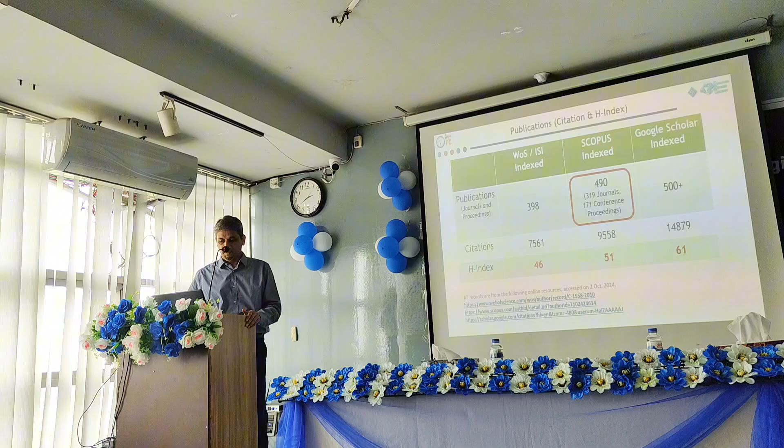Definitely, I have so many co-workers. I would like to acknowledge first, before I start my topic, the 2 research institutes I worked in Malaysia. One is University of Tenaga Nasional, or National Energy University. The other one is the National University of Malaysia, where Liku did his PhD. He was supposed to do PhD under me, but he changed the field, and that is very good luck for him, I believe.

Still we are connected, my students, my colleagues, and my collaboration partners, home and abroad, Malaysia and other countries, and also the useful literatures I use sometimes, and some of the pictures I use here.

So we always prefer that we are committed for a solar green Earth. As of today, you know that this university is very lucky to be so green, but if you go to other places, they are not lucky. There's one building, for example, if you go to Brac University, if you go to East Coast University, I've been there for some other purposes. I saw that even the places in Bangladesh, other places, are not as green as you are. You are very lucky. So we are also committed to make the Earth real green with the use of solar energy. That's what our slogan is.

One of our efforts I always share is this book, Academic Press, published in 2020 I think. It's a group effort from our research group, and I have contributed 2 chapters, which is available: comprehensive guide on organic and inorganic solar cells. The first chapter and third chapter is contributed by me. You can check, this is the group effort. This is really a nice book, you can share and sometimes refer.

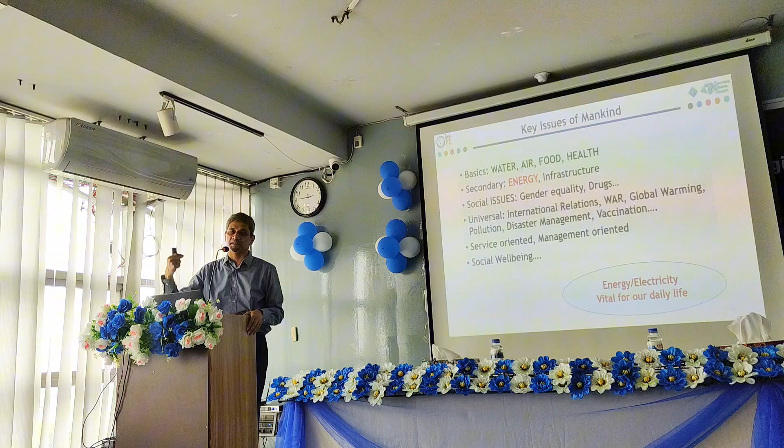I cannot simply discriminate against the effort of any single researcher who has published one paper with his integrity, with his honesty, with all his effort. He is also equally important as I am, at least I can say.

So here, the key issues of mankind, the basic needs: we always know that we have water problems, air problems, food problems, health problems. The secondary energy infrastructure, our road infrastructure, is suffering a lot. We are losing work hours, man-hours every day. A huge amount of man-hours of the whole country is being lost due to communication problems, right? So there are so many problems.

So electricity is one of the problems, energy, because this is vital for our life nowadays. Without electricity, I'm not sure whether we even have electricity here right now. We don't have electricity, right? Yeah, or it's running on the IPS. So sometimes during the lecture we also see interruptions of electricity, this and that.

So Sir already mentioned that we have 3 conventional ways. In fact, most of them are God-gifted, like coal, gas, and oil. These are God-gifted fossil fuels, which were accumulated over millions of years. But within the last 200 years, we have been so lavish using them. Now we are saying that crude oil may last 40 years, natural gas may last another 60 years, coal may last another 80 years.

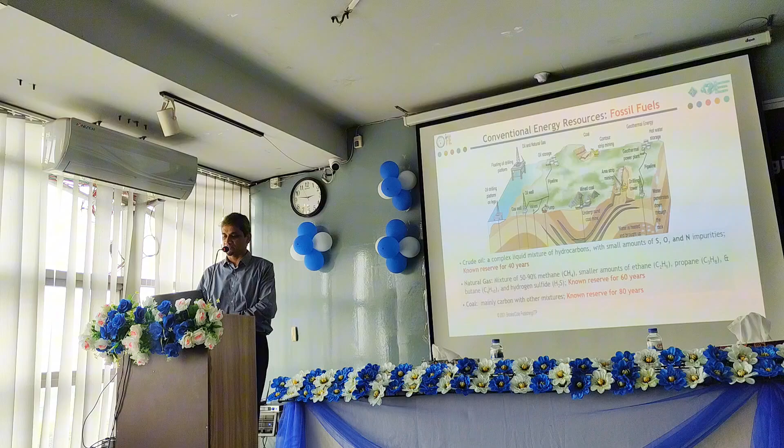So we already know these reserves are very limited. We cannot simply solve the problem because we are too dependent on this and we have been so lavish using these things. These are called non-renewables, and these non-renewables have disadvantages. What are the disadvantages? The main issue is pollution. We have so much pollution due to this lavish use of fossil fuels, like air pollution, water pollution, land destruction, and also radioactive waste from these so-called nuclear power plants. And also we have wars. The war happening around us is not for peace; it's for domination of the oil field.

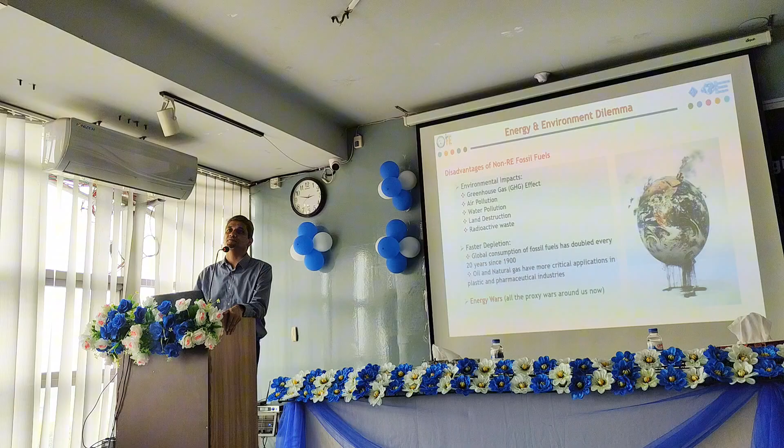In a single line, this is domination of natural resources. We have problems associated with the usage of renewable and non-renewable resources like fossil fuels. So what is the problem, and what is our main refuge, or how to overcome these things?

So there are countries now who are enthusiastically adopting these renewable resources. Many countries are using renewable resources, and you can see some catchphrases, like India has the world's largest solar farm, and some countries are changing their golf fields to this and that. Every day you will find new things.

I started this research in 1996 when I started my master's in Tokyo Institute of Technology. At that time it was a very meager, very small figure of renewable energy adoption, maybe less than 1% in the whole energy scenario. Now it's different - over 25% global final energy and over 30% of electricity production are coming from renewable resources. This is the new figure.

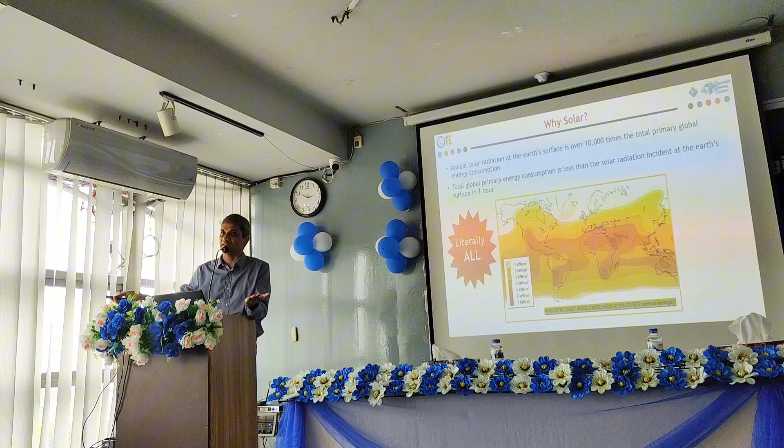So as I mentioned, how can we get solar energy in the form of usable energy - meaning electricity? Straightforward - the purest form of energy is electricity. Electricity can be converted into many other options: sound, heat, whatnot. So how do we convert this solar energy or sun's energy into something usable, or electricity?

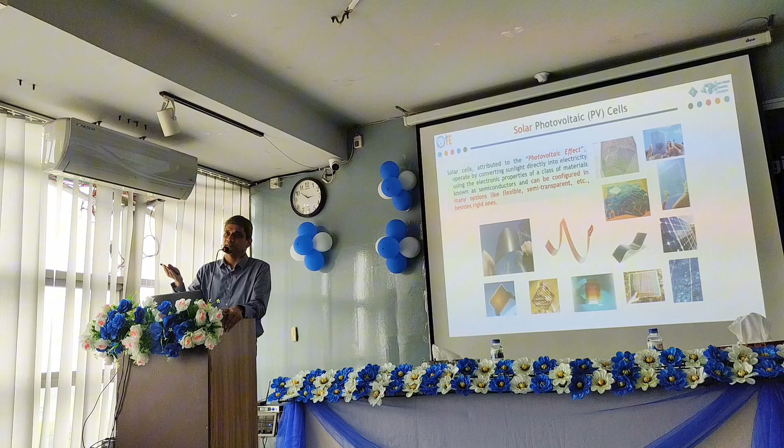There is some physics behind it, called the photovoltaic effect, which was discovered almost 200 years ago by French physicist Edmond Becquerel. Recently, maybe in the last 60 years, we started making conversion devices, which we later named solar cell or solar photovoltaic cell. This photovoltaic effect means whenever you put some materials under light, any kind of light, they produce some kind of voltage - that's why it's called photovoltaic effect, or photovoltage is created.

Using this physics phenomenon, we can make different kinds of devices, like a kind of sheet, a paper sheet. If you just face it to any kind of light source, it will silently produce electricity. All you need to do is make the solar panel. So for the working principle, I have a video here - I'm not sure whether it will work, let me see, it's from the NASA website. So from the sun, we are getting packets of photons, which we call the particle of light.

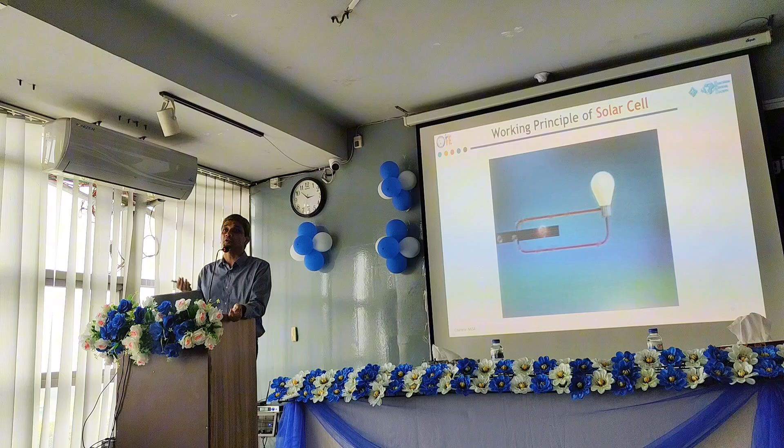So whenever the solar cell, a 200 micron thick PN junction, large area PN junction, is struck by the photons, what will happen? This junction area will release energized electrons, which will come through the circuit. So all we have to do is wait for whenever the sun is up. Even though there is no sun, even 10%, 20% light, electricity may be produced from the same cell. There is no need of direct sun.

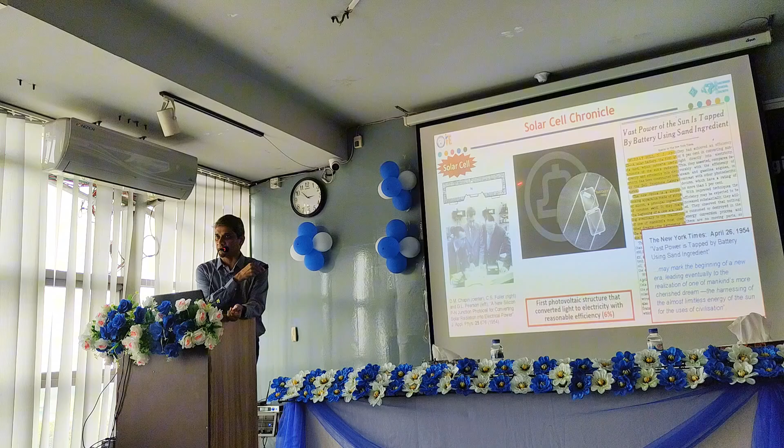So this is the solar cell, a very simple device. As I mentioned, almost 60 years ago, Bell Lab first invented it. Three gentlemen, Chapin, Pearson, and Fuller, invented this p-n junction solar cell: N-type semiconductor covered by p-type semiconductor, with only two terminals. This solar cell was invented around 1954, and it was producing 6% efficiency, meaning if 100% light comes into that area, through the terminal you get 6% electricity. We call it energy conversion ratio, or simply efficiency. So this stuff, whenever it was invented, was a very precious thing.

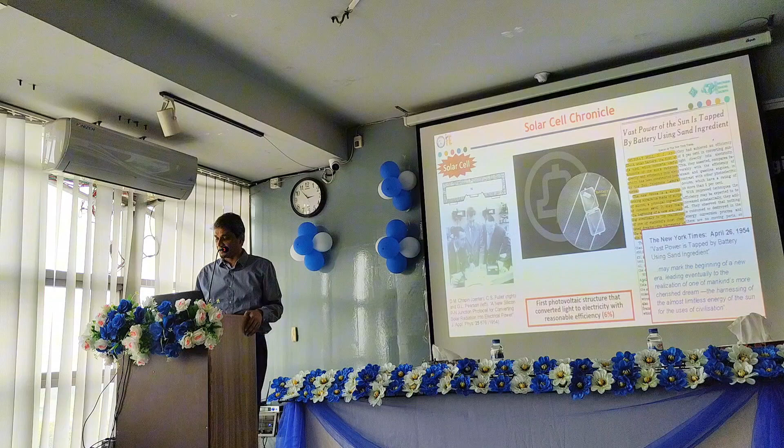There was a newspaper article, you can see on the right hand side bottom, 1954, in the New York Times, saying the vast power is tapped by battery using sand ingredient. Sand is silicon, so it was made of silicon. In fact, this solar cell, after 60 years, is giving 1.5% efficiency still, which shows its integrity and durability.

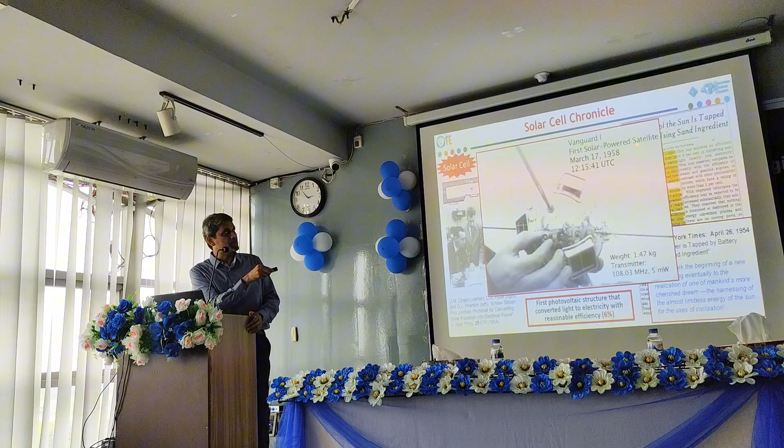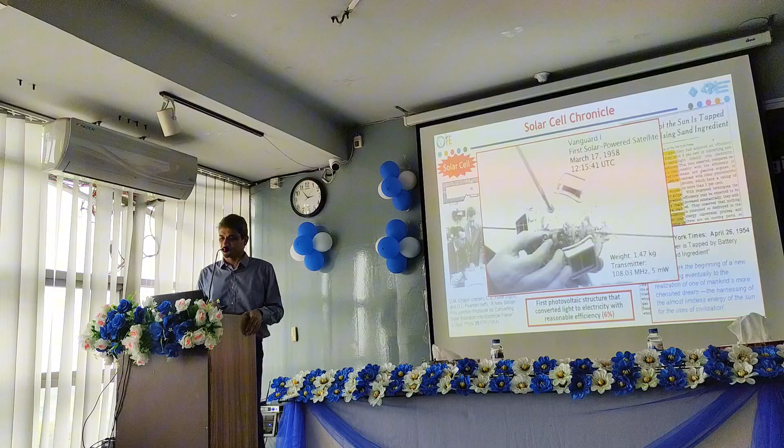Interestingly, after it was invented in 1954, solar cells were being used only in space applications. This is the first solar-powered satellite, which was launched in 1958, and it is still giving us some ping. I got a public lecture where the professor showed us this one, this bird is giving us some kind of signal called a ping signal. So it is still running on the solar cell.

Classification of solar cells. I'm just talking about solar cells because it has huge potential for research. We have so many combinations and permutations of different materials, different device structures, all those things. So there are so many ways to do research. Let me give you the classification in terms of generation.

The first generation solar cells were basically made of silicon, crystalline silicon. There are two factions: one is single crystal or monocrystal, the other is polycrystal solar cells. You can see on the left side. And in the middle, the thin films, which you can put on glass, polymer foil, or metal foil, a thin layer of semiconductors to make solar cells. I did my master's and PhD on this, so I have expertise in this.

And then the new versions, over the last 20 years or so, a new material called perovskite, then tandem structures. There are so many different configurations, then dye-sensitized solar cells. There are so many different materials and configurations, so we can make a lot of options. Research papers will come out from that if you simply focus on it.

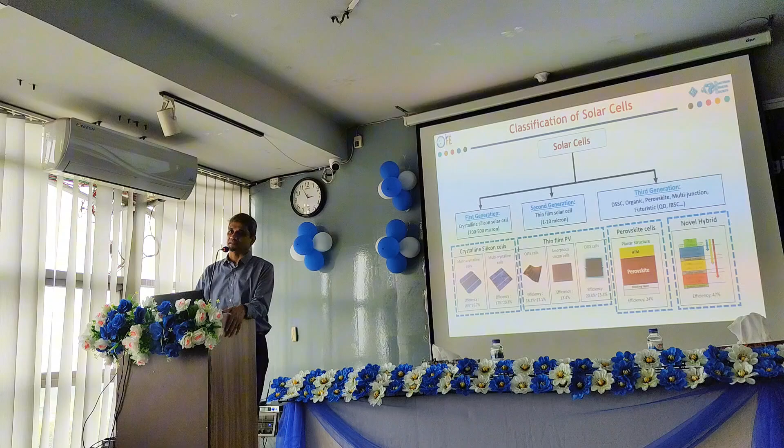Evolution of solar panels. Whenever I went to Japan for my undergraduate study in 1990, I purchased this in 1991. This is a Sharp calculator with thin film technology solar cell, almost 32 years ago. This is still running, and it was in the milliwatt peak range.

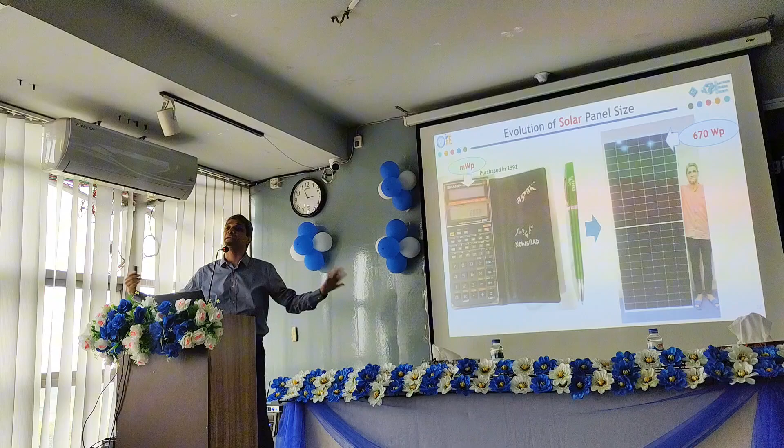Now recently I visited one of my students' companies in Bangladesh, in Dhaka. He showed me, sir, this is the panel we are using for a rooftop project. So how big is it? Physically it is bigger than me, more than 2 meters, and wider. What is the electrical output? Electrical output is 670 watt peak. This one was milliwatt, maybe 1 or 2 milliwatt peak. So how many times has it evolved? It's big and large now.

Are commercially available solar panels widely used? Yes, first and second generation solar cells are commercially available, as I showed in the classifications, many different kinds. But in Bangladesh, you can find only monocrystalline and polycrystalline, you see the dark color, black color, or blue color, only these two colors you can find. The rest are second generation solar cells, which are not easy to find here.

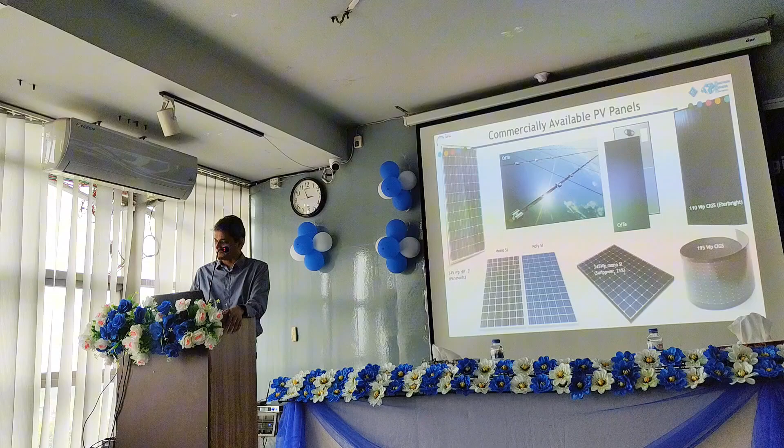Different kinds of solar cells are improving cell efficiency. Whenever efficiency gets bigger, we get more output - the same area gives more output if efficiency is larger. This is what the research community is contributing: how to improve solar cell efficiency and how to reduce the cost. These are the two key points.

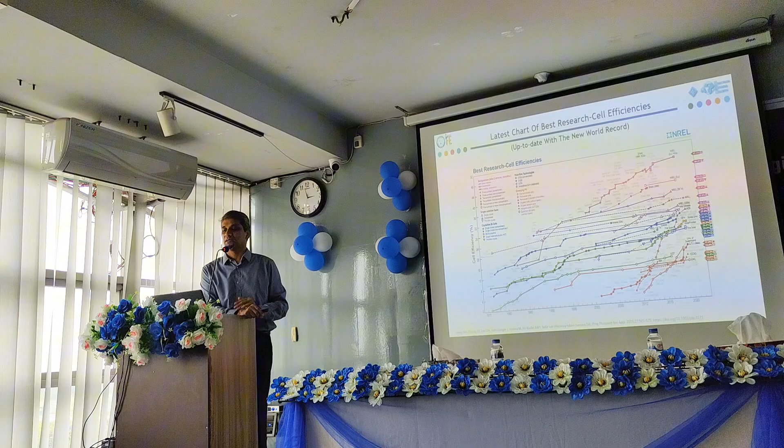Over the period, we can see some solar cells are 47% efficient, some are maybe 11% efficient, but they are of different kinds and of course different cost per watt peak. Definitely, if you pay more, you will get 47% efficient solar cells.

Where are they being used? They are used in space applications, satellites - these are the concentrated type or multi-junction solar cells. Other solar cells, most of them, we use here in terrestrial applications.

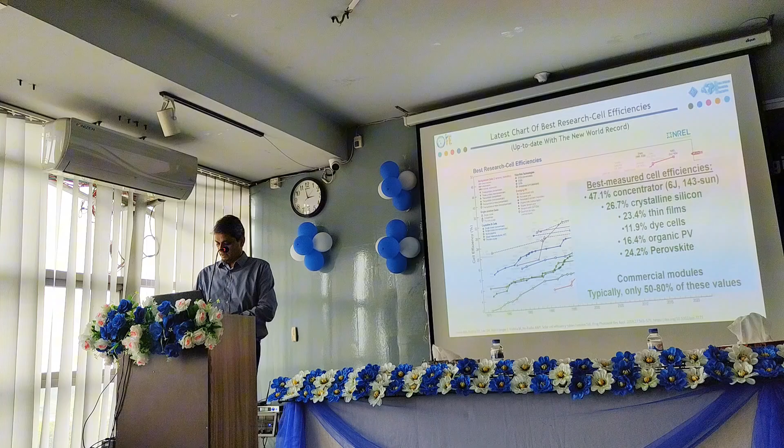How did we get this over the last 30, 40 years? Because people work very hard. Researchers like you work very hard around the world to improve the efficiency year after year.

People are using one-panel systems for rural electrification and water pumping. Even in Japan, the rooftops are no longer distinguishable - they are building integrated, what we call building integrated photovoltaics.

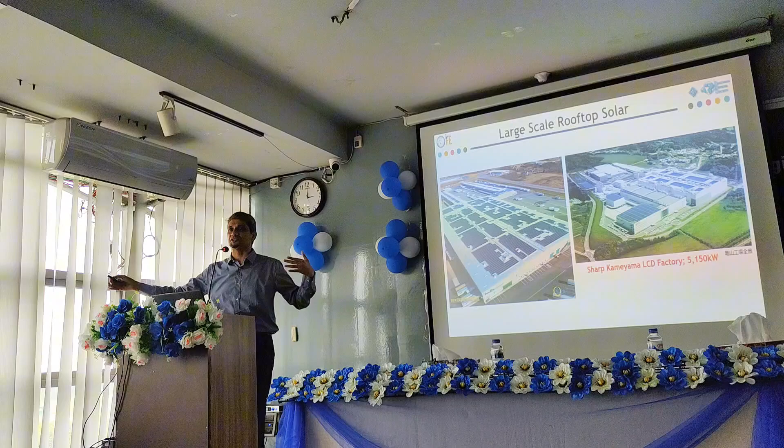There are many large area installations like manufacturing plants, R&D facilities, and ready-made garment factories in many places in Bangladesh that are now enthusiastically installing solar panels. And if we complain about the land problem, the solution is there.

Agrivoltaics - you can simply put the panels up about 2 meters high and still cultivate underneath the solar panels. In Bangladesh, in Sirajganj, there are now 68 megawatt peak installed this way, so that they can cultivate vegetables and other things beneath the solar panels. I'll show the picture later on.

We can take lessons from other countries. Even without knowing it, in Mithapukur, there is a system by Nowshad where they just put solar panels, and they found that beneath it, paddy still grows the same way.

Now the question is, we talked about solar, but is it possible to compensate or replace nuclear power plants with solar plants?

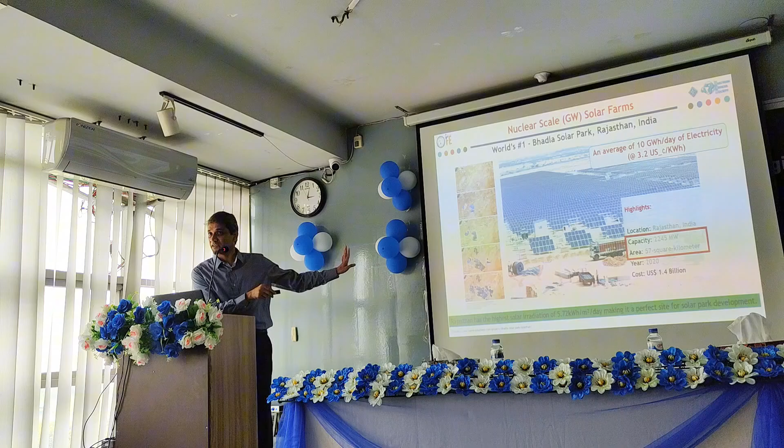The cost is 1.4 billion US dollar. Just remember this figure. Bangladesh's Rooppur nuclear power plant, nameplate output is 2,160 megawatt, cost is 13 billion, and you have to spend billions after billions for nuclear fuel and then the waste management and everything. This solar park, every day they are getting 10 gigawatt hour per day, and the cost is 3.2 US cents, roughly 3 or 4 taka.

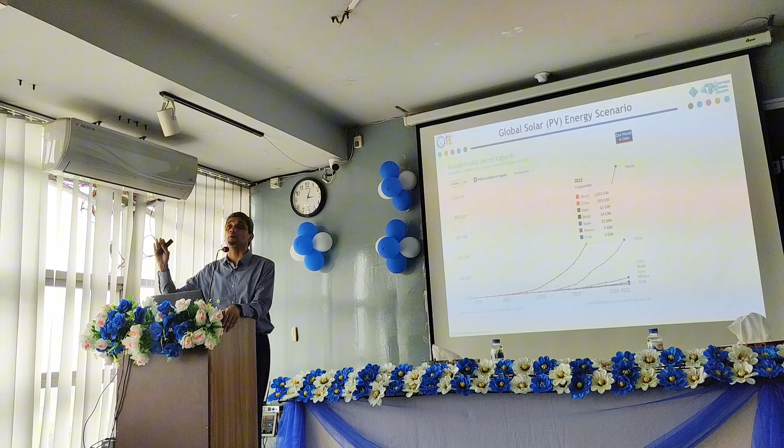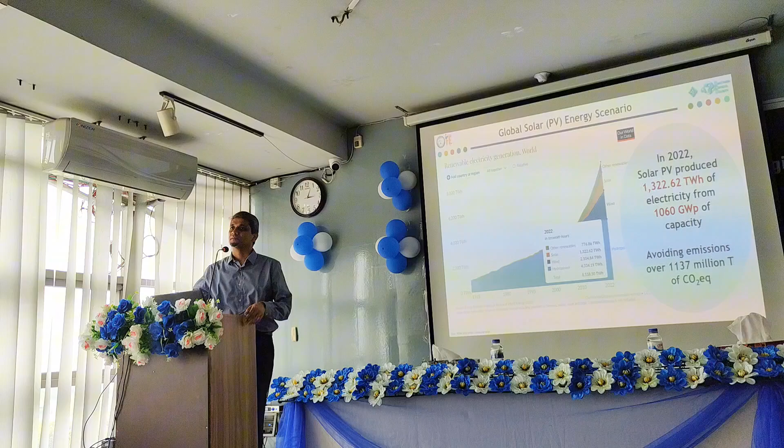So what is the scenario, the latest scenario? How are we adopting? You can see the picture. The world now, by the end of the year 2022, has more than 1 terawatt of solar installation. By the year 2022, not 2023—it will be more than that, more than 100 something.

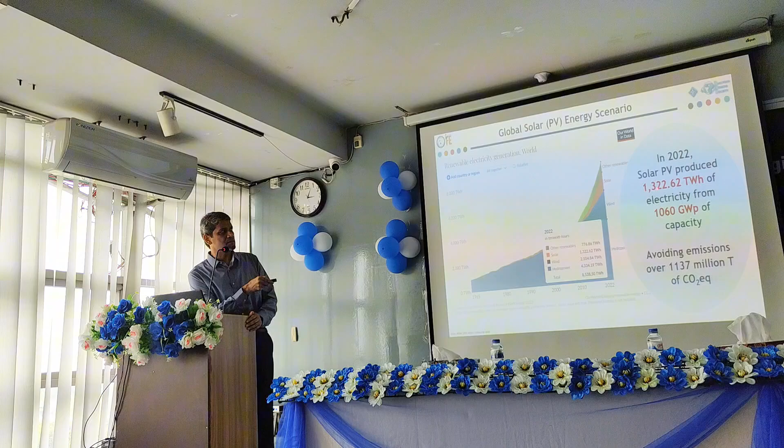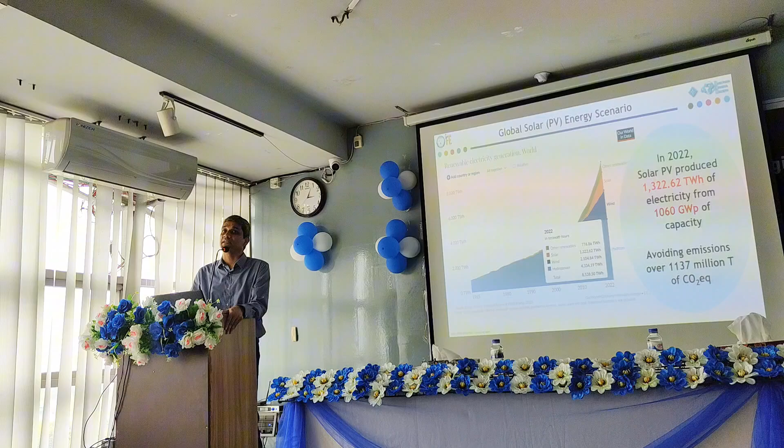So we have over 1 terawatt of solar installation, which produced in 2022, 1,322 terawatt hour of energy in a whole year, produced from solar PV panels. It also avoided 1,137 million tons of carbon dioxide. We call it carbon sequestration. So it is hugely contributing to environmental pollution mitigation.

Electricity from solar, once upon a time, was like 3 or 4 times more expensive, but now it is all neck and neck. By the year 2020, IEA already declared that solar electricity, around the world except Japan and some other countries, is the cheapest among other resources, for example coal, oil, or wind, per kilowatt hour.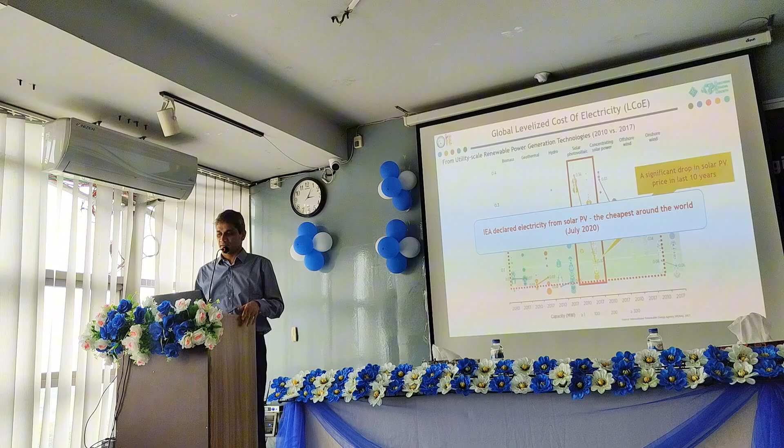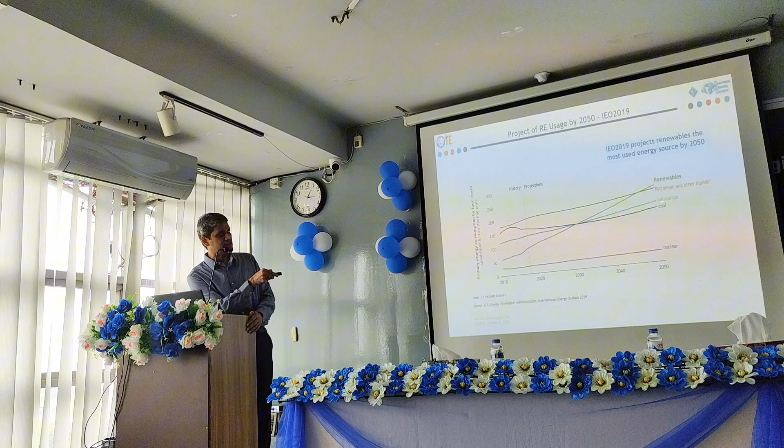As I already mentioned, by the next few years, maybe nuclear will still be there by 2050. Coal slightly up and down, natural gas same or slight, but renewables are getting high, and of course solar PV is one of the mainstream of renewables.

I'm showing this study done by Stanford University in the USA. They studied 139 countries, doing an energy roadmap for the future for each country. By 2050, they found that 139 countries can be 100% renewable, and in that option, 47 to 50% will be from solar, and the rest from wind, biomass, and everything. So solar has a huge prospect.

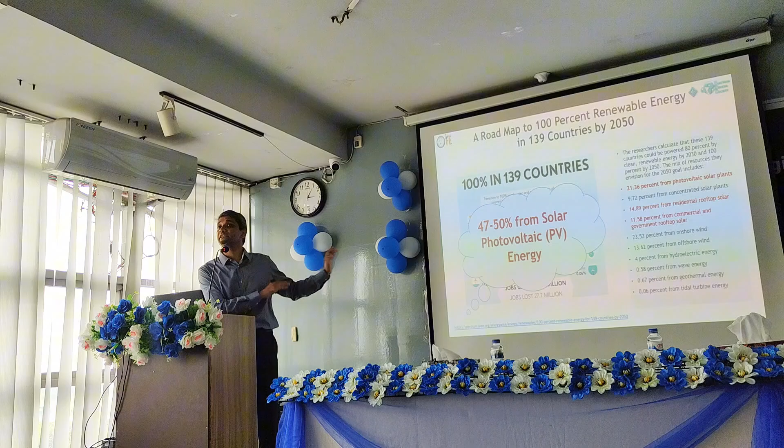That's why I said, just think of it, just make sure that you believe it—the data says that. Okay, this is the overall platform now produced. Now we have to look into the scope for us. We are staying in this very nice place, although it's very inconvenient to get to here. So what are the scopes for us in terms of engineering, and I'll also show the research scopes. First of all, engineering scopes.

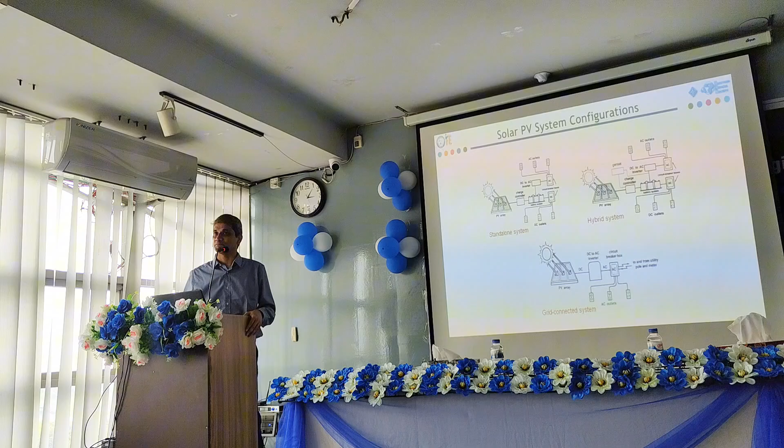Yes, solar is a system—a generation system. So we have solar standalone system, hybrid system, grid connected system. So in the system, you can be a system integrator, or PV installer, as we call it. You can be that. In Bangladesh, there is no professionally accredited installer.

Like, so who is doing it? They just learn, like for example, some become medical doctors just with learning—compounders become the medical doctors, not actual medical doctors. Something like that. Those who are installing do not have proper guidance, proper knowledge, proper training. So even with just 3 months training, you can be a very good installer. The installer can do what they can do.

They can do the total synchronization of the heart of the system, which is the solar panel; the brain of the system, which is the charge controller; the stomach of the system, which is the battery, for external systems. So they will do the optimized synchronization.

Okay, so there is a huge scope here, engineering job opportunity. Our system failed, most of the systems are failing everywhere. Rooftop system failed, garbage—we see.

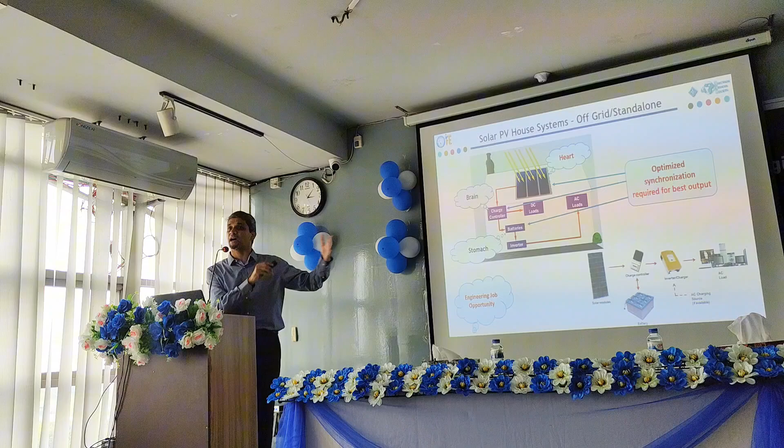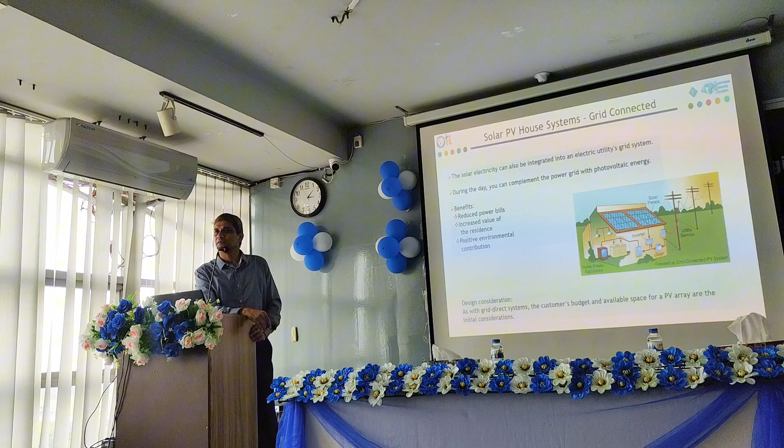So this grid-connected system is now very nice because the grid is the battery. We don't need a battery in our home. We produce and we sell, we need and we buy. So there is an elimination of the battery need, huge cost cutting. But we have a problem—so huge job opportunity.

And this is some of the schematics of these systems. For example, direct connection. Once upon a time, FIT, feed-in tariff system, was very popular, but no more. Now we have the NEM system, the Selco scheme, and all those schemes. So engineering job opportunity there.

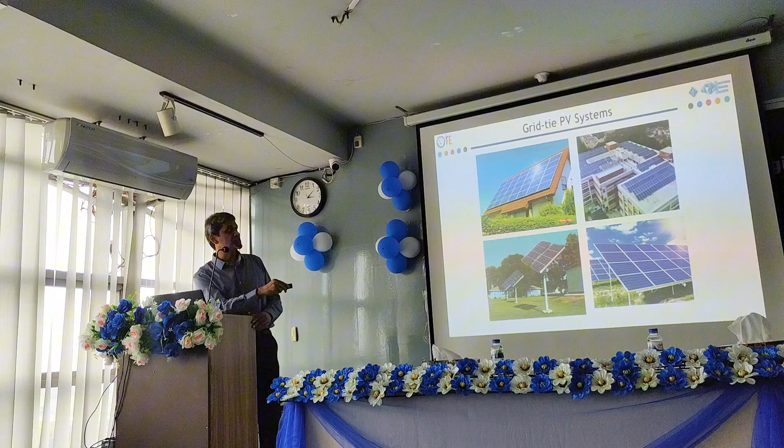Some of the pictures of the grid-tie systems on the rooftop. Even Green University—you are green by name, but you have to be green in terms of energy usage as well. So you can propose to your university, since you have a huge area, and it's very nice. You can be well compensated by the renewable energy resource. Within 6 to 7 years, I guarantee the ROI will be met.

Okay, large scale solar farm. This is one of the mainstream now, even in Bangladesh. Once upon a time, I have been professing since 2007, and I met you in 2012, right—12 or 13, you came to see me, 15 now. Before that, I had been giving lectures to UIU and many other places.

So they didn't believe that solar can solve our problem. Now they always say, oh, we don't have land—we have. Believe me or not, in Bangladesh, large scale solar farms are becoming very, very common—20 megawatt, 30 megawatt. I'll show you some of the pictures. So you can be an engineer for that large scale project. I'll show you those afterwards.

Bangladesh scenario—so research scope for you. Your Dr. Musa was telling me, he was also very blunt to me. He was asking, how can I be a 2% researcher? I said, no need—be a researcher, no need to be a 2% researcher. This 2% thing is a kind of scam.

Honestly speaking, we have so many different kinds of fields, right? You are comparing between apple, mango, banana—you do banana first, then orange second. I'm not sure whether you think that way, but what I think is we cannot simply classify our researchers that way. There will be a very unhealthy, corrupted, unethical competition in the future. Researchers in Japan, the USA, Germany—they don't care about this ranking.

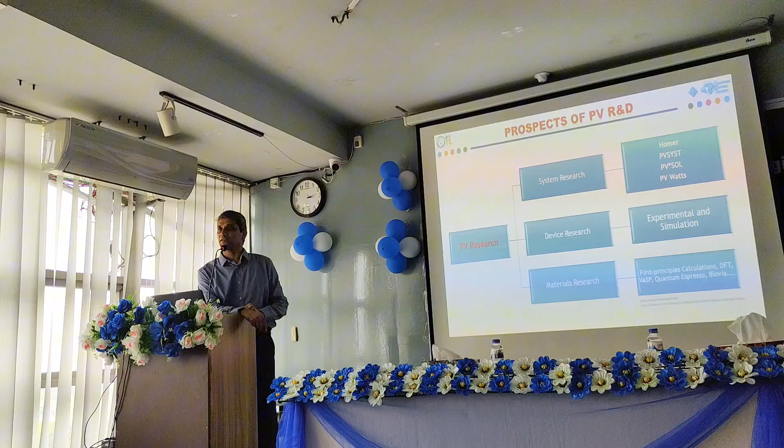And for solar cell device simulation research, there is so much research. I see that most of the IEEE conference papers here on solar are mainly based on simulation. You can also do simulation, but you have to be innovative in terms of your device structure.

Solar cell technologies now - as I mentioned, it's not only the solar cell itself, but the technology includes other parts, like controllers, so-called hybrid inverters, all those things, right? And I think Liqui is also working on battery management systems, large area battery management systems, so that could be a part of that too.

So we have potential research focus. First of all, we call it BOS - Balance of System - meaning charge controllers, PV inverters, grid inverters. These we are still buying from elsewhere, but we could have done our own product development. Once upon a time in Malaysia, I was at National University of Malaysia where Dr. Deep got his PhD.

There we started, because I could not do my solar cell basic fundamental research, so we started from applications like controllers, different kinds of controllers, and some product development.

Then charge controllers - you can still do charge controller development with different AI implementation, IoT implementation. You can do inverters, grid-connected inverters. We are buying inverters from other countries, but we can do our own product. Still, there is scope. You can have your own startup company to do IoT-included inverters. So you have the scope for product development or innovation.

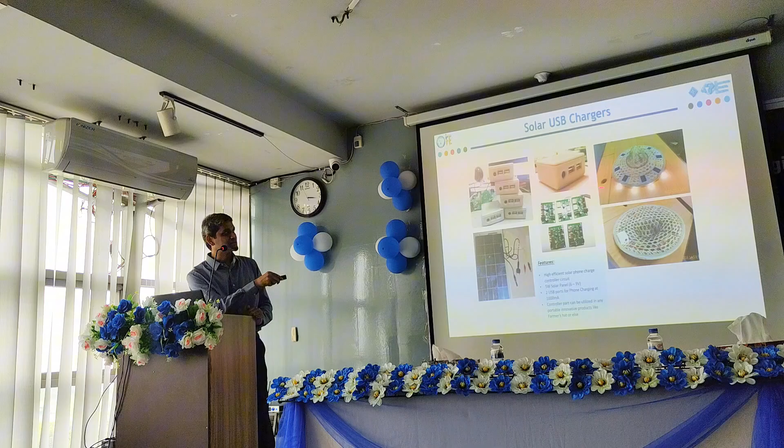So the cap, I just put this way so that the farmer at night can hang it in their courtyard and enjoy the light with high-powered LED lamps, and they can recharge their mobile phone. Whenever they are doing work, they can listen to music or whatnot. So then this is a drone.

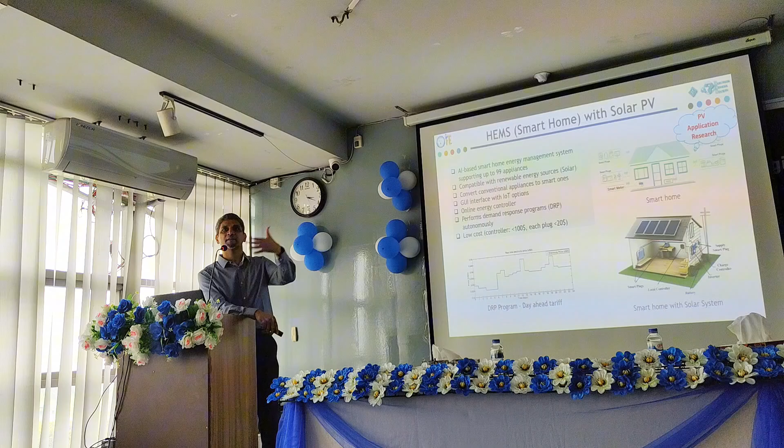So what not - these are for smart meters for the microgrid. Still we are working on it, our capstone project students are working on it. HEMS means Home Energy Management System, so that you can minimize the energy bill of your house or even your whole premises. You can do IoT sensors and minimize your energy bill. This is the prototype house that I used for our HEMS controller and smart plug.

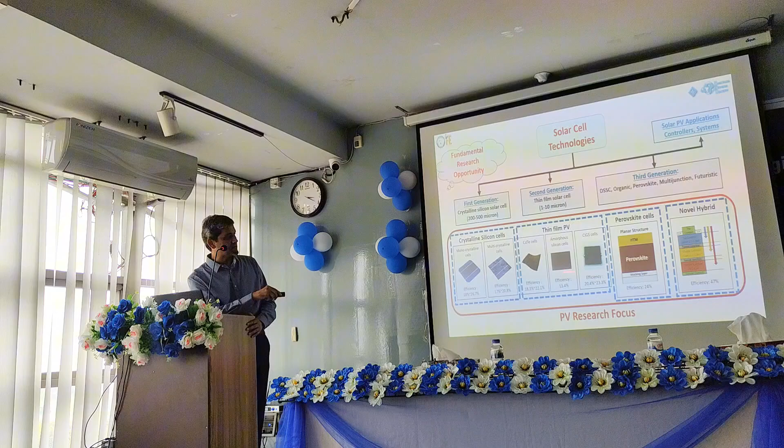Now I'll show you some of the research opportunities in this field. For example, to do a solar cell, you need to have knowledge on material science. You need to have knowledge on electronics, like the PN junctions - there are homo junctions, hetero junctions, all those structures. You need to have some knowledge about the fabrication process, how to make it. And then also finally economics, like whether it's viable for commercialization or not. So I started my journey because I came almost empty-handed from Japan to Malaysia.

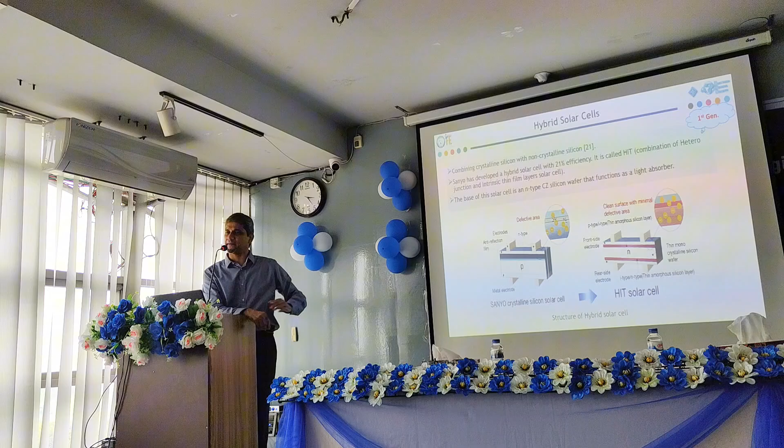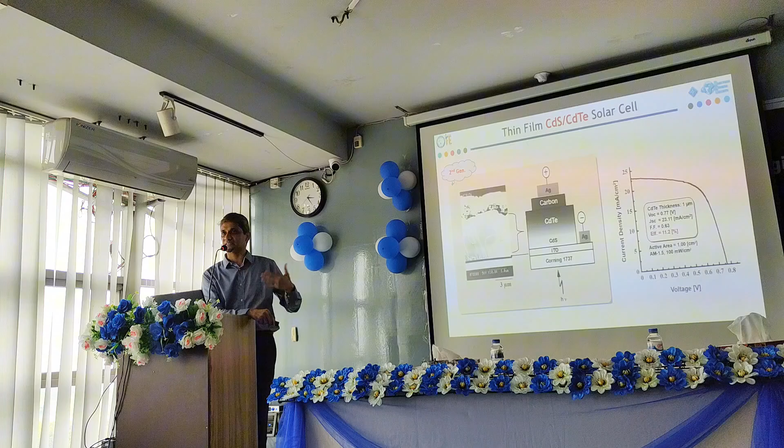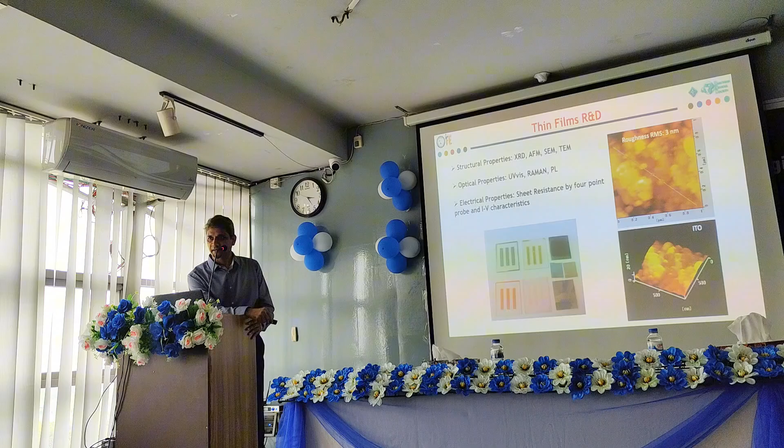And also these are the cells from the second generation solar cells, and how we increased the efficiency. These are the logic or rationale behind it, we call it prospect. Then thin films R&D - you can do thin film R&D if you have the facility. In Bangladesh, I'll show you later.

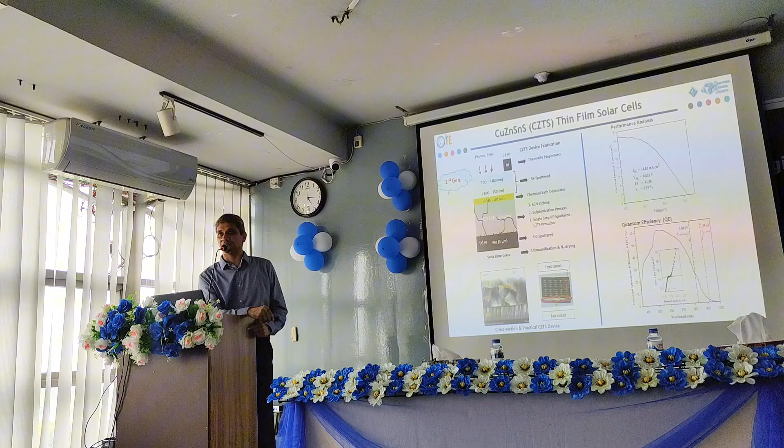Some kind of solar cells are like this - this is relatively less expensive material, copper, zinc, tin sulfide. This is also a semiconductor, and you can also make flexible solar panels. Innovative solar cells - my professor showed me the HIT-structure solar cells by amorphous silicon, pixel type solar cells.

This is the perovskite solar cell, which has shown tremendous research scope in recent history. Since 2007 it started from 5 or 6% efficiency, now it is 25% efficiency. So in perovskite solar cells, those who want to do simulation work can get ideas from the layer information. We also did some study on the perovskite side and found 18% efficiency. These are the small cells in our facility.

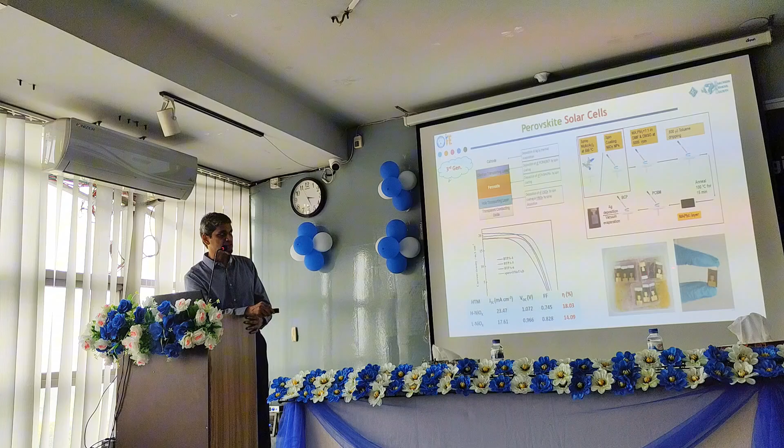Now about the systems, because I said Bangladesh is now a good user of solar panels. Once upon a time people said Bangladesh does not have large area space, but we will see a lot of 10 megawatt, 20 megawatt, even 200 megawatt solar plants being installed soon. The largest in one single place is in Sirajganj, which is around 68 megawatt.

So we need some system-related activity, engineering, or research. First of all, you have to understand the reliability of the solar panels. If you buy from Tier 1 manufacturers, meaning the best 10 manufacturers in the world, their panels are simply durable for 25 or more years. But some second or third generation solar cells are not that durable, nearly 15 to 20 years.

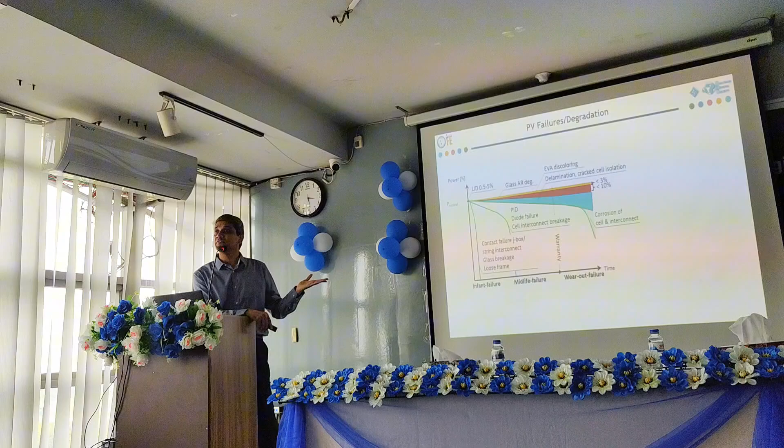So what happens to the solar panels? For example, we found from some study a timeline showing power percentage. Day one, if it's giving 100%, in a few months it can fail for different reasons, or it can fail gradually, and after 25 years maybe only 3% degradation occurs if it's the best panel. But in between, we call it midlife failure, because of some causes, fluctuations in nature, some humidity, it may be a different case, and we may lose output power from the solar panels.

So we can study those. What we would like to understand is that solar panels can fail due to different reasons, for example optical failure, electrical failure, mechanical failure, and also potential induced degradation failure.

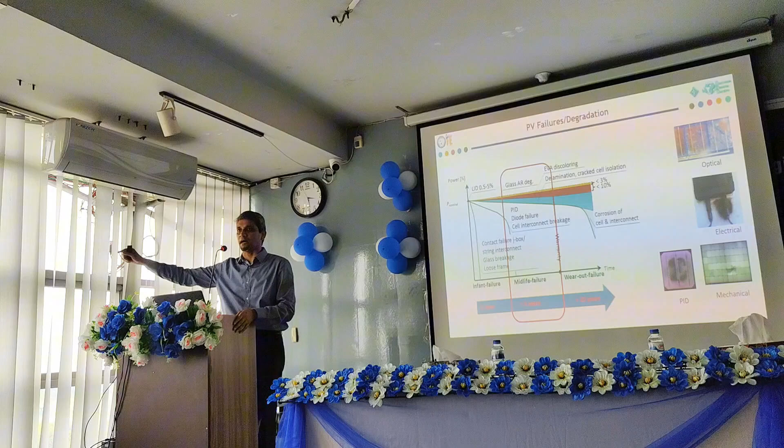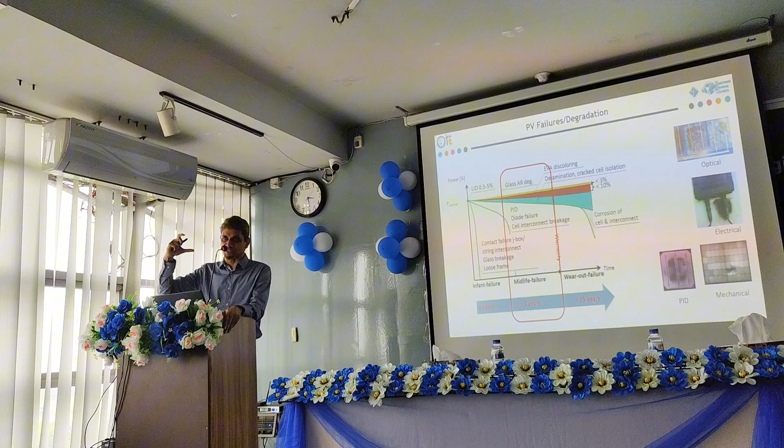So whatever solar panel installations are here, on rooftop or on the ground, we can do maintenance study. This is a scope for you, students — you can be a maintenance engineer, carrying simply multimeters and some visual inspection tools. You can be there, and after that, for example, end of life.

In Bangladesh, almost 15 years ago, there was a mandatory rule that every house should put 5% solar panel on their rooftop. But what happened? People put just substandard products, there was no monitoring, no regulations. So it became a huge garbage for us now. It has lead in it. So if you just simply dismantle and use it for landfill, there will be problems with our underground water. So you should recycle it.

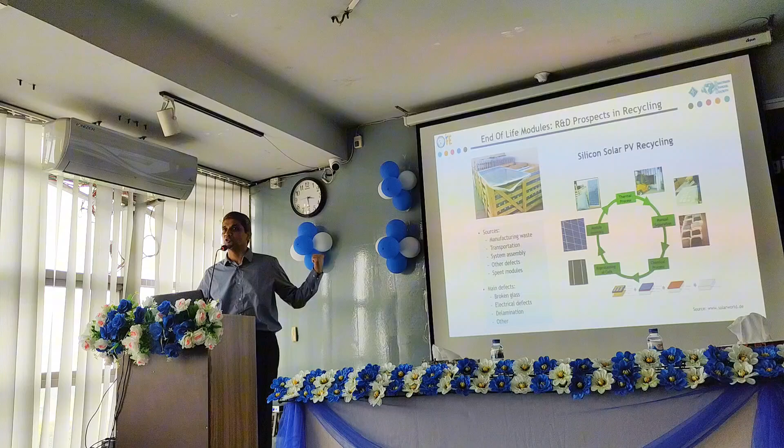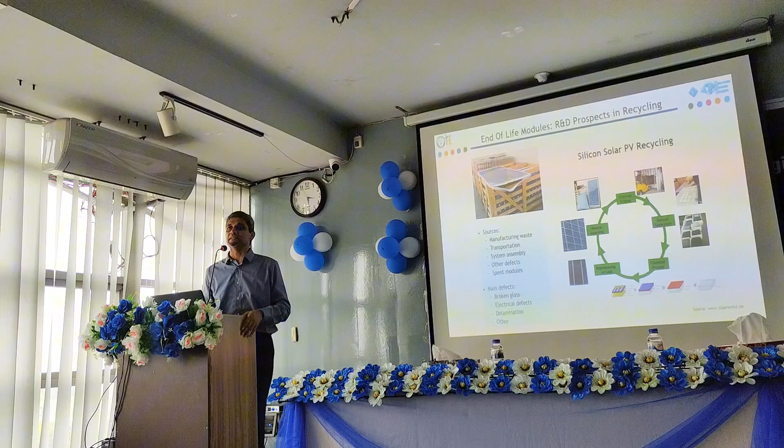So solar recycling is maybe a new business for us. Those solar panels you collect, either crush them, segregate the elements, and you can sell it — this is a good business. So in the recycle process, the greatest thing is to reuse and recycle.

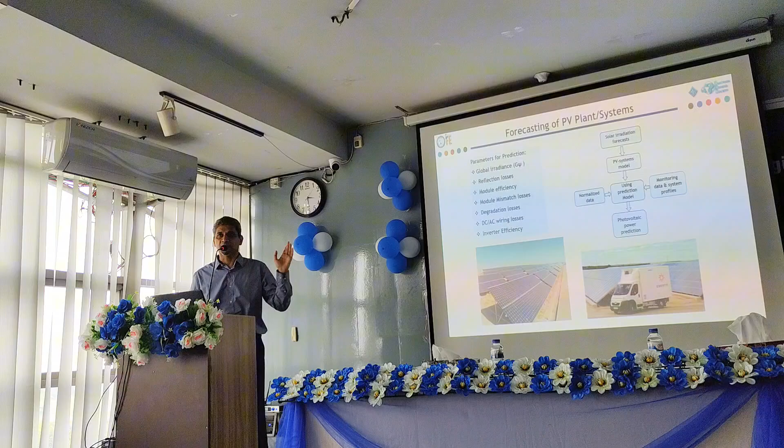The last one I'm going to tell is for those from computer science background — you can do forecasting of solar plants. You can convince your customers or clients, whenever proposing new plants, saying this plant by this time will produce this much. One day ahead you can give predictions, we call it prediction modeling. With the use of AI technologies, we can put whatever parameters we have into our algorithm, make prediction modeling software, produce papers, or use it for our projects.

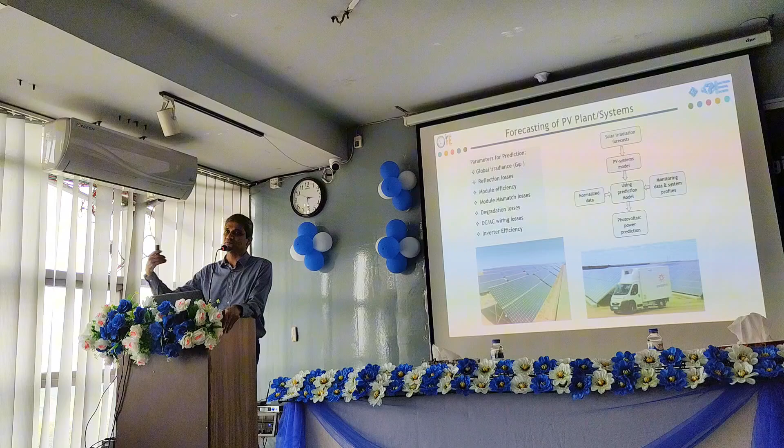So now, what is the status of PV in Bangladesh? Because I have shown you everything possible in the field of PV, as a researcher, as an engineer, right?

So now, what is the status of PV in Bangladesh? And what are the potential R&D sectors?

First of all, you have to know that Bangladesh aims to be 40% renewable by the year 2041. I don't know why they put 41, why didn't they put 2040 in its energy mix. So currently, we have 4% renewables out of 29,000 megawatt capacity, although we are getting only 13,000 to 14,000 megawatt every day.

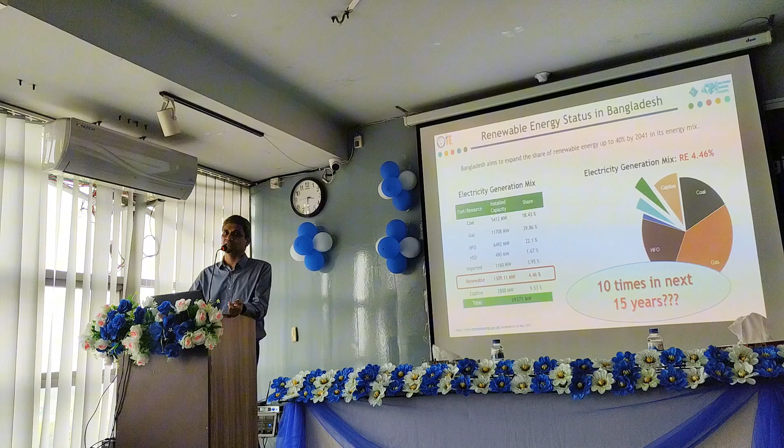But the ambition is within 15 years we need to go 10 times. Is it possible? I'm not sure. It's a very highly ambitious plan for the country. I mean, not the recent one, maybe the previous regime.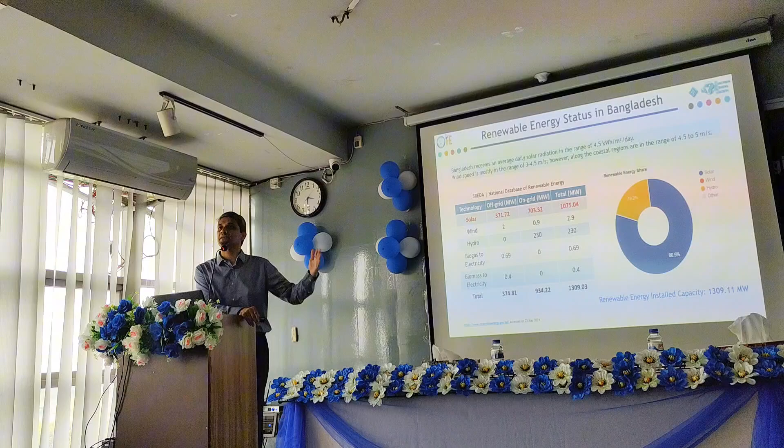So, what is the status of solar PV? Solar PV now simply crossed the milestone of 1 gigawatt after all these years. Since 1990, we have been using solar panels in a small scale. I'll show you that chronological history. So now, recently, Bangladesh surpassed the 1 gigawatt milestone. Do you remember the whole world has now over 1,000 gigawatt, right? Out of that 1,000 gigawatt, 1 gigawatt is from Bangladesh. Bangladesh is contributing 1 gigawatt of solar installations.

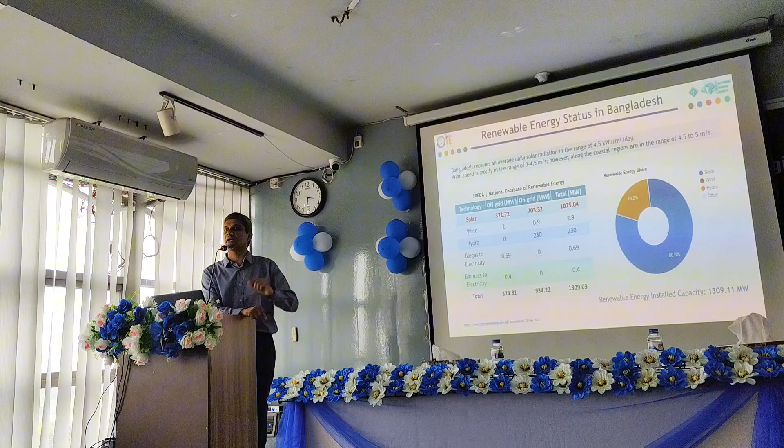But in future, Bangladesh is planning to have more. Okay, so let's look at the historical timeline.

After that, there are mini grids, which are equipped with solar plus battery storage. After that, the first grid connected plant was installed in 2017. This one in Shorishabari of 3 megawatt. It was installed and we can provide to the grid. So it is grid connected.

After that, rooftop systems of different sizes, and the biggest rooftop in Bangladesh is Young One. Young One is a Korean company. I think in one place this is the highest number after Apple in California, 16 megawatt on the rooftop they put. This is a Korean company.

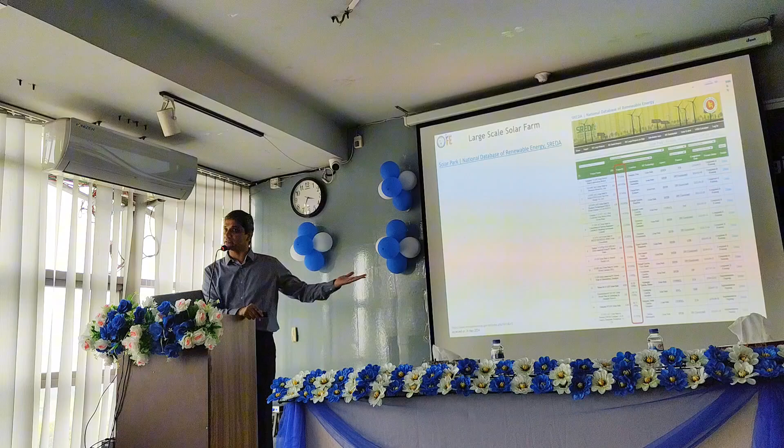Although there are companies which are in the pipeline, those will be installing 100 megawatt in one place. Even in haor area, you can see nowadays large scale solar farms also. So you can still plow, or put vegetable vegetation underneath. This is just beside the Jamuna River in Sirajganj. And you can check the lineup, for example in multi megawatts, in one single space, 20, 30, 50, 100, 200, something. You can check SREDA website how this sector is also being encouraged in recent years.

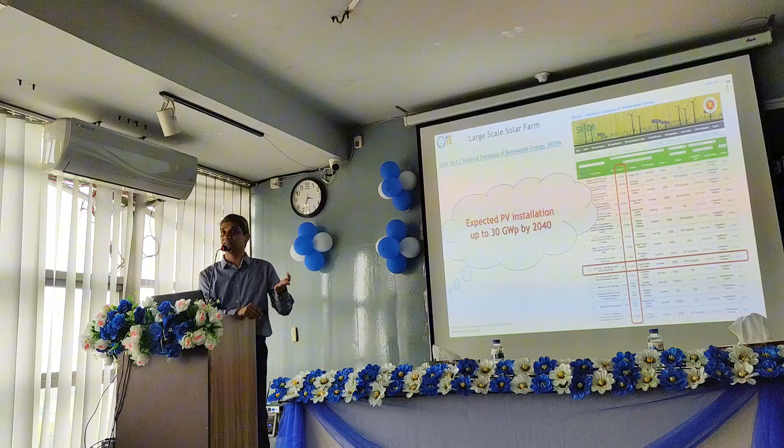So expected PV installations by 2040 will be 30 gigawatt. Now we have only 1 gigawatt, so we have to put another 29 in the next how many years? 15 years. Okay, this is the estimated cumulative PV solar.

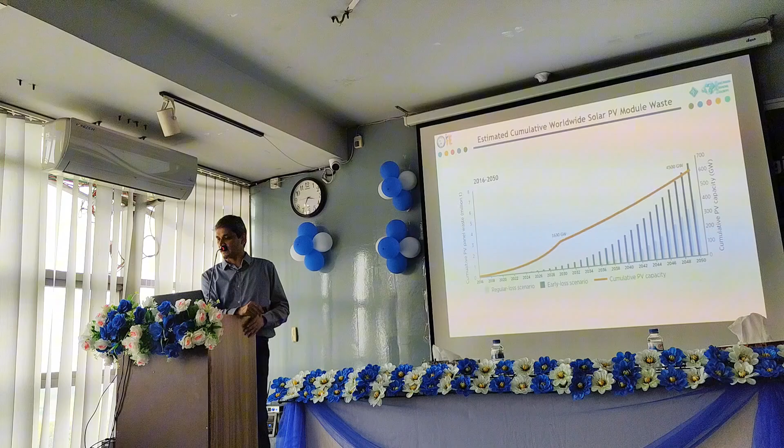I am talking about the waste now, right? Because after 25 years, the PV waste will be coming out, and Bangladesh is also expecting 196,000 metric tons of end-of-life solar PV. So this sector will be your next venture. You can have a PV recycling power plant or recycling plant, like the shipbreaking yard in Chittagong. You know that Bangladesh is the second largest country which has shipbreaking yards. The same way you can start your activity.

Academic research towards the end, of course, needs management support. The top management should support the research activity. I'm not sure how the young researchers are managing here, but they're still publishing papers.

The main important thing is postgraduate study. For undergrad, we don't have that much time due to capstone projects. This is my few months experience in Bangladesh. Most papers come in IEEE Xplore, which is conference proceedings, not too many journal papers. Journals need more concentrated work from postgraduate study.

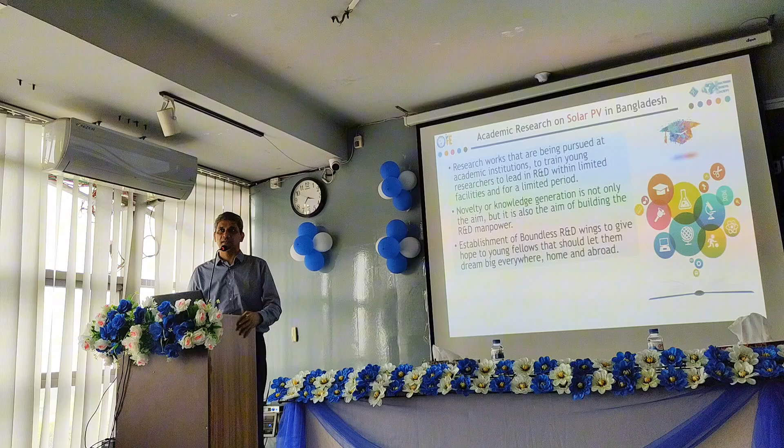I heard UGC might give permission for private universities to start postgraduate studies, so we can do our postgraduate study. Academic research is very tough in Bangladesh, with many limitations, but some universities like BRAC University are offering me to join them to establish their research wing.

Before that, let me share some experiences. In CUET, around 2012-13, I wrote a proposal to get funding from HEQEP. World Bank supported some projects, so they got 5 crore taka. They have a renewable energy lab with installations, and we already produced many masters and two PhDs from this lab.

But the bigger one is in BCSIR, IFRD. They got 29 crore taka in 2015 or 16. I gave them the whole idea, everything, and also trained them for a few months. Finally, they got the lab.

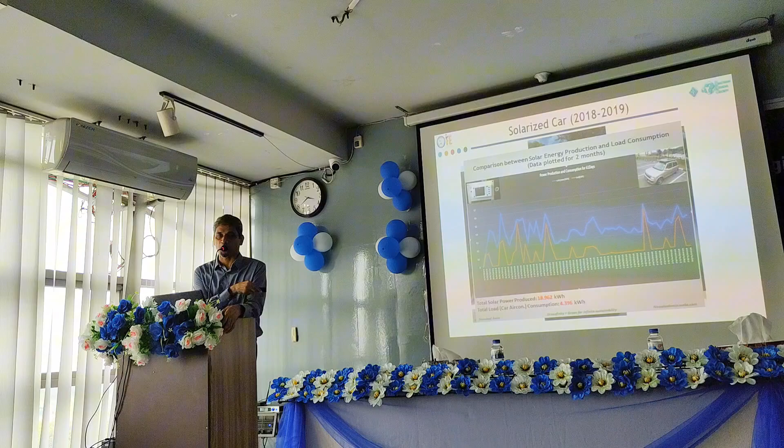I have a plot for 2 months, and I found I'm getting more energy - I got a total of 18 kilowatt-hours but used only 4. So you can do some resizing of the solar panels.

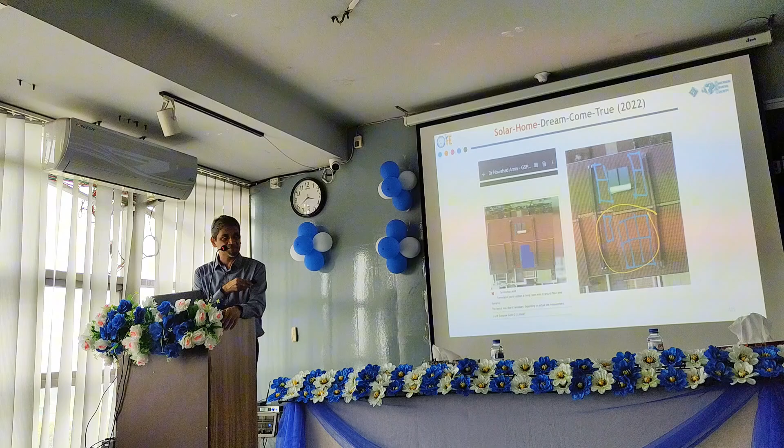Also, I used to live in a very narrow, slum-type house, where we requested solar panels, and there's a system where we can pay the price over 3 years. So how was I benefited?

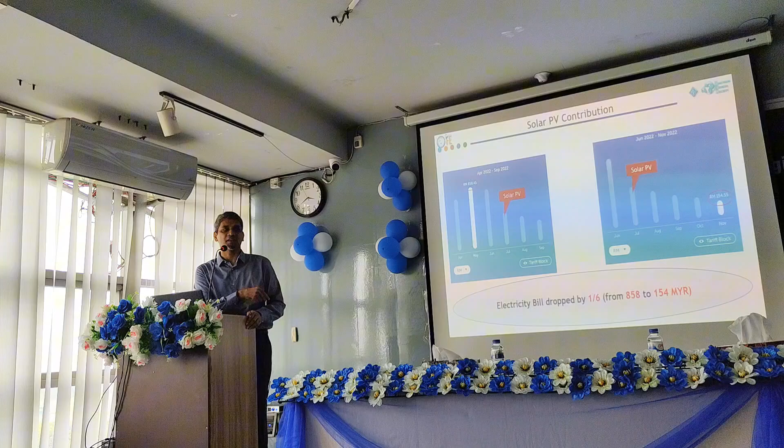I was benefited before the solar installation. I used to pay 850 ringgit Malaysia, but after installation, I'm paying only 150. So the electricity price reduced almost 1/6.

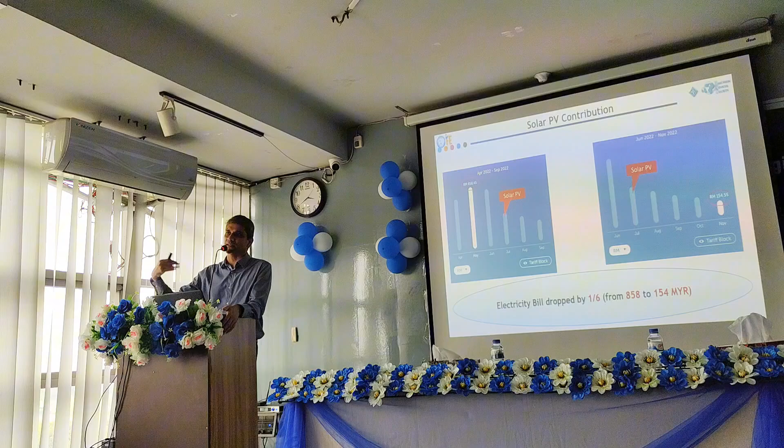I'm not going to do the concluding remarks. It's very general, but what I'm going to share is the prospect of PV career for you.

For example, in Bangladesh we can develop a possible degradation model of the failed system, or use a smart monitoring system and analyze the root causes under realistic Bangladesh conditions. That is PV doctoring, PV monitoring system. Bangladesh has now 1 gigawatt, and the whole world has more than 1,000 gigawatts, so there will be problems in the PV out there in the field. You can go and check, you can be a maintenance engineer, first of all.

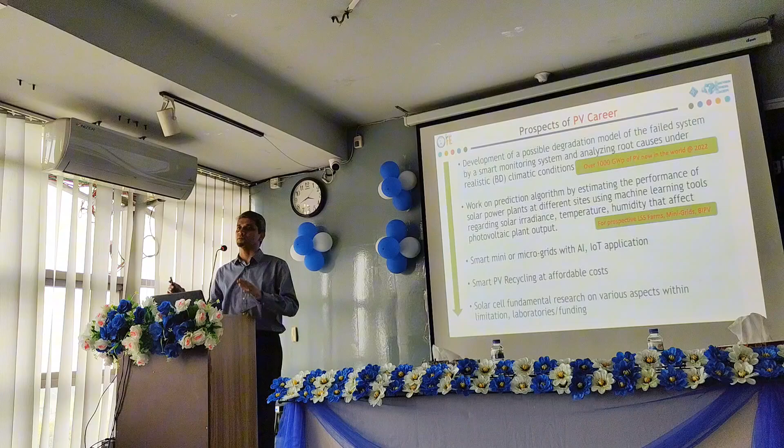Number 3, smart mini or microgrids with AI and IoT applications. A mini grid or microgrid you can set up in your own area. Even in the Bashundhara area, a few houses can set up a microgrid. Now my students are doing feasibility studies in about 10 houses, looking at how we can make a small grid, microgrid or nanogrid, and how we can understand the energy flow and energy sharing policy.

Number 4, smart PV recycling. This is very important. After a few years, you will be having tons of waste, electronic waste plus PV waste. PV waste contains lead, because we use soldering. So lead should be collected, otherwise it will contaminate our groundwater. Recycling should be done.

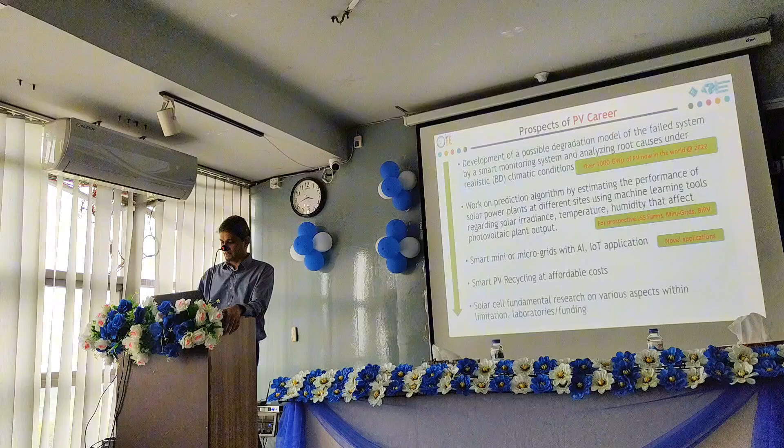The last one, solar cell fundamental research. Although we don't have any fabrication facility here, we can do masters elsewhere and carry out our activities. If not, it still builds our capacity, our competence, our confidence.

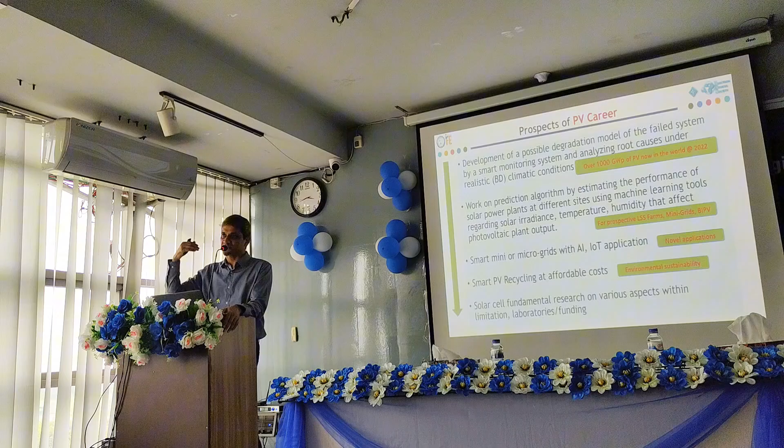We know everything. For example, sitting here, in a place that takes almost 2.5 hours to reach my home just 15 kilometers away, I can still talk to solar researchers worldwide. I can talk to them in their own language, they understand my language, I understand theirs. That means confidence building. So we do cutting edge research for what?

China has crippled Japan, China has crippled the USA in terms of fabrication and manufacturing. Everything is from China. They know they cannot compete with China, but we still do the research because we are building our confidence. We can work there, China will hire us. China knows they have a problem with their own engineers, their engineers don't speak that much good English. We, to some extent, understand English and can speak English, so they will hire us.

So this is about laboratories. Still, I encourage people to do nanotechnology, material science, even partly we can do that, and we can sell it to them. If we can solve some problem, we can sell it to them.

So that's all. Are we ready? With that, I'd like to conclude. Thank you so much.